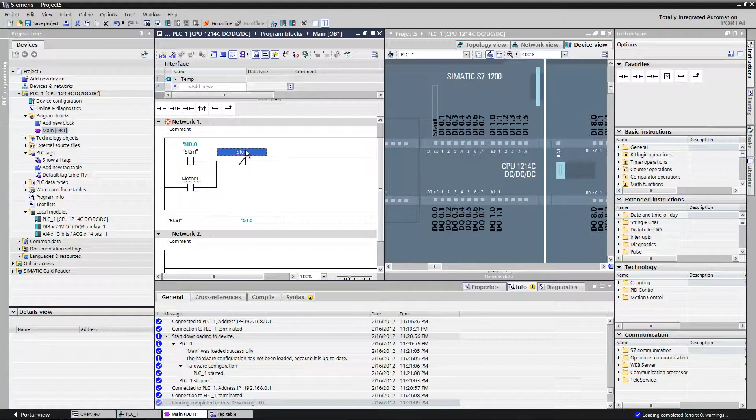These simple movements can add complexity to any automation system, especially if you have a lot of them. Let me show you how easy they can be.

First step is we're going to create a new project. Accept a default name, it's not a problem. We're creating a project container now for all the hardware and software to go into.

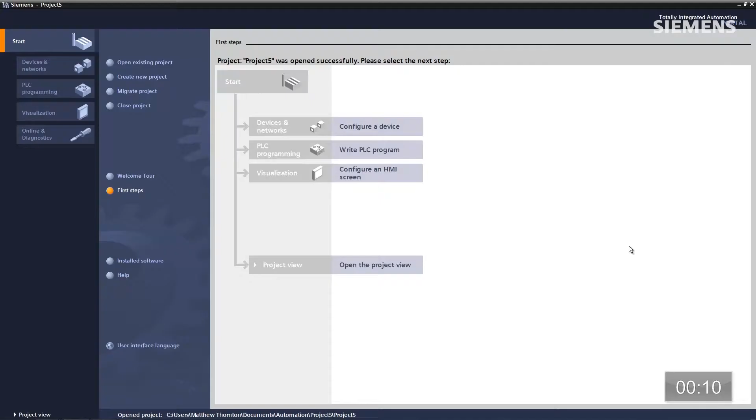Next step is configure a new device, add new device. We're going to choose something called the unspecified S7-1200 CPU, click add. So now we're taking the project container and the hardware container and adding those two together for the project so we can start.

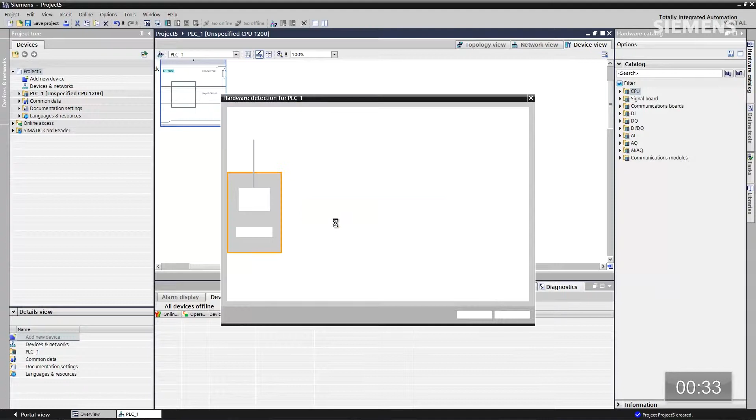Okay, so we have the actual hardware here in the white box. I have a little pop-up box. I can click detect. I'm going to go out and scan the network now, try to physically find that hardware, and we have. I'm going to click on it, and in fact I can click the flash LEDs to prove out that this is the correct hardware, the correct piece of hardware I want to detect.

Click detect again. This time we're going to go out and scan Profinet, go find the exact CPU and all the associated I/O cards as well as communication cards, and bring it back into the project so we can start programming immediately. The beautiful thing about this is I don't have to use the hardware catalog to pick and choose every single piece part. I can scan it, find it, bring it into the project, and go.

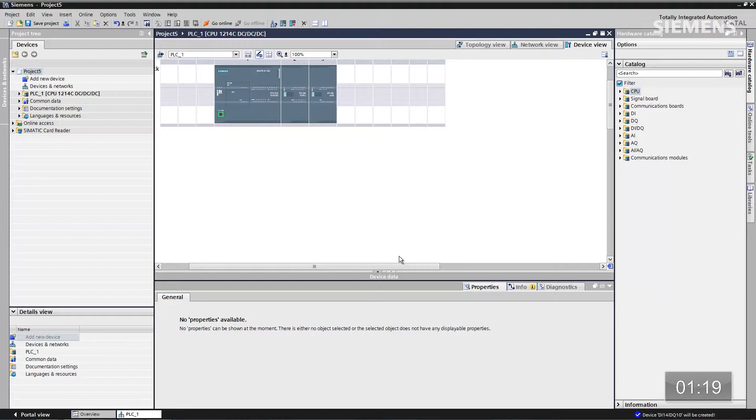Next step, what if we want to change an attribute of this hardware? Let's do that. Let me right click on this analog card, click properties. Now you can see I have plus or minus 10 volts for this analog card. I'm going to choose plus or minus 5 volts.

I'm going to give focus to the CPU and I'm going to click download. So now I'm taking the physical hardware configuration, including attribute changes, and downloading it to the actual hardware set so that it's an operational piece of hardware.

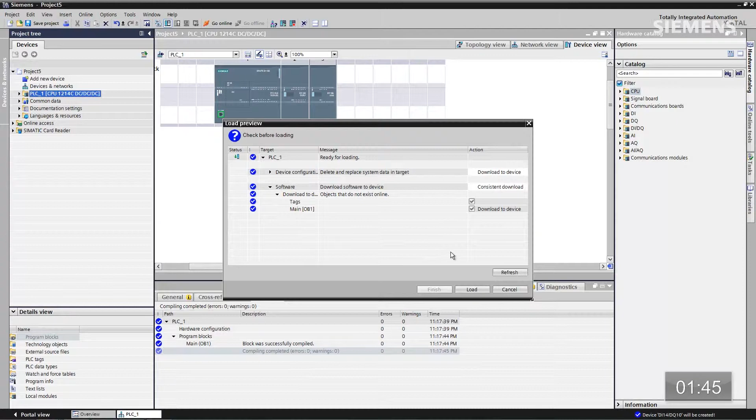It's compiling in the project. I click load. Now it's actually loading this to the actual CPU itself. Once it's finished loading, I can click the finish button, click start all, click finished, and now we should have a set of all green LEDs for this piece of hardware.

Now, remember I changed one of the attributes for the analog card. That means I could actually turn this analog potentiometer, and you see we actually have red LEDs across this. I went beyond the 5 volts.

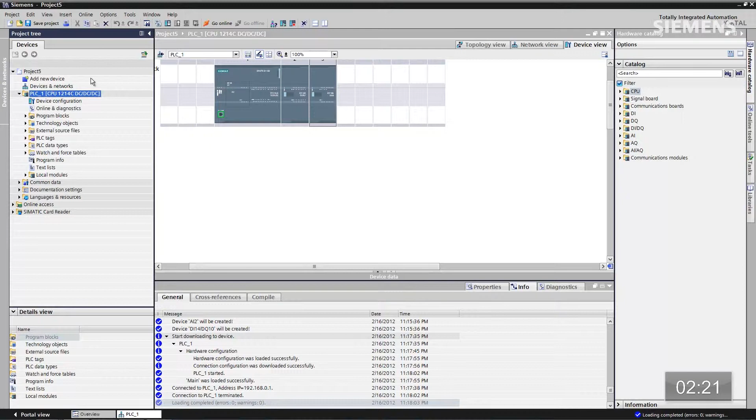One thing you can do immediately is go online with the CPU. Give focus to it, click the online button. Now that we have orange bars across all the physical hardware, you can tell that we've been online with this hardware set, and you can see all the red wrenches here.

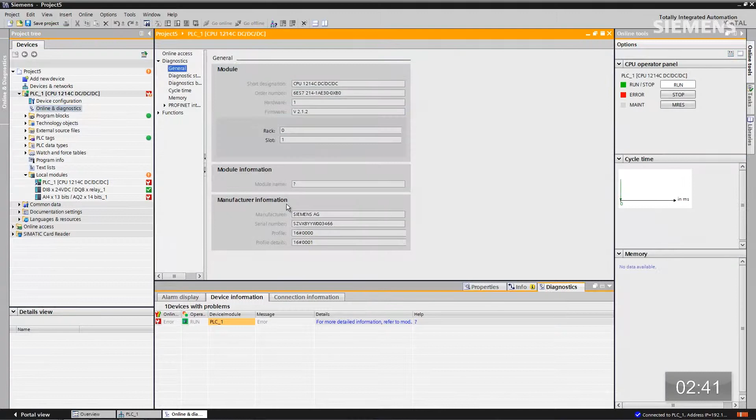I can go down to the module level and see that there's something going on with this analog card. At this point I can double click on online and diagnostics and go to the diagnostic buffer, and as you can see we have a high limit exceeded with the wrench for the actual output of this analog card.

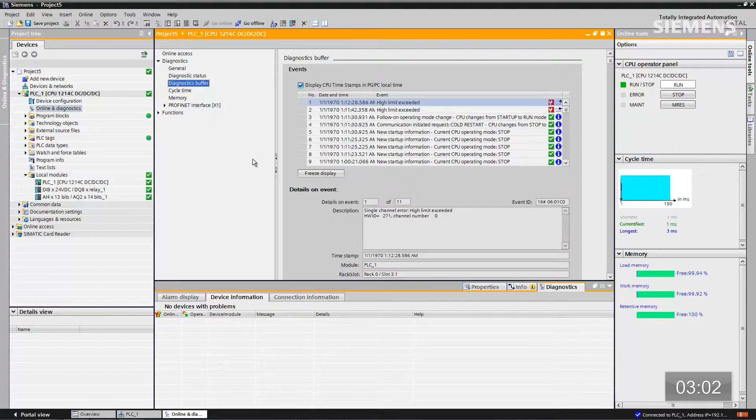So if I go back and solve the problem, turn the switch back, now it's an outgoing message and the issue is solved. Basically this means we have the ability to create online diagnostics for your hardware set, and you didn't have to do a single thing to do that.

You didn't have to program for it, you didn't have to choose any menus, it automatically gives it to you right out of the box. So let's go back offline with this CPU and close this screen, back to the hardware set.

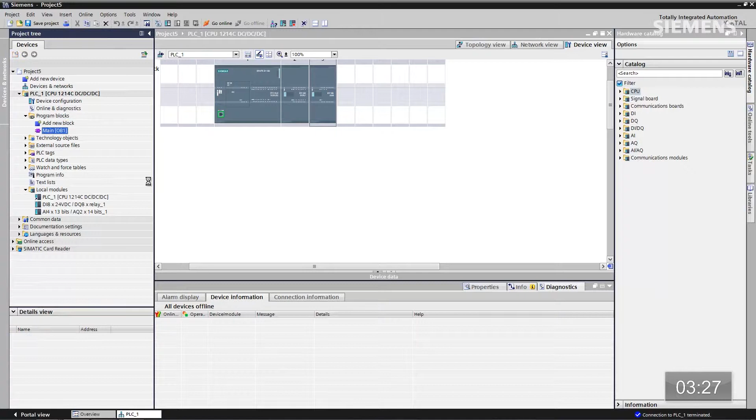How about programming? Let's go ahead and start that right now. First step, the main OB. You can see, if I go here and start flipping dip switches, I have absolutely no program in this particular CPU at this point. It's just a hardware configuration.

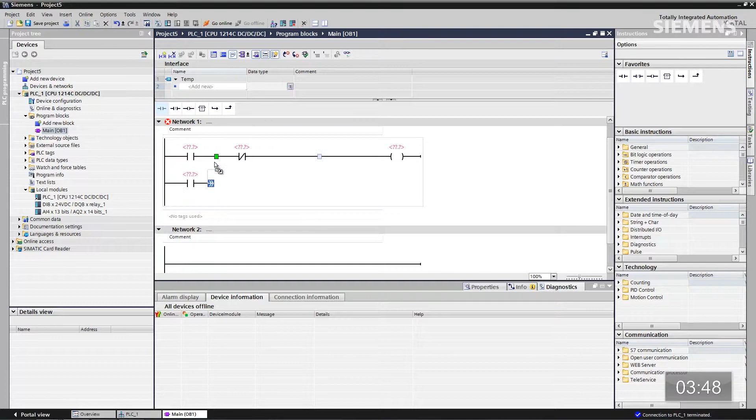Let's go choose a normally open contact, a normally closed contact, a coil, another normally open contact. Let's tie those together. So now I've actually literally built a seal-in circuit, used time and time again in automation engineering. How about the tags?

Let's go start programming that real quick. Let's say start for the first one, motor 1 for the next one, stop, and then for a coil, motor 1. So our seal-in circuit's done, our tags are done, however they're not tied to the hardware set yet.

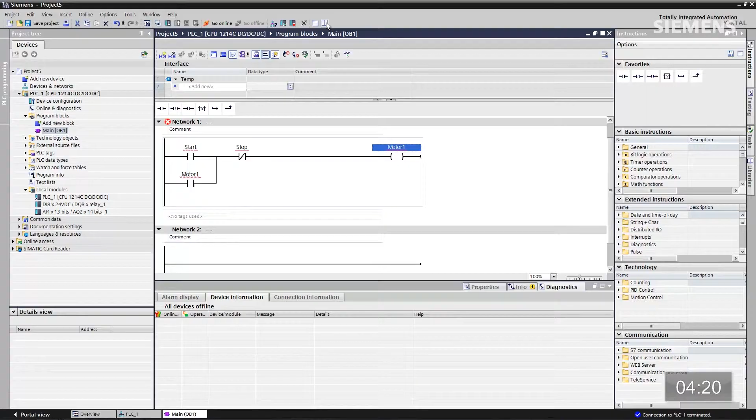So next thing I can do is a split screen, give focus to the CPU, go to 400%, and as you can physically see here, the hardware set has the associated bits of the actual points.

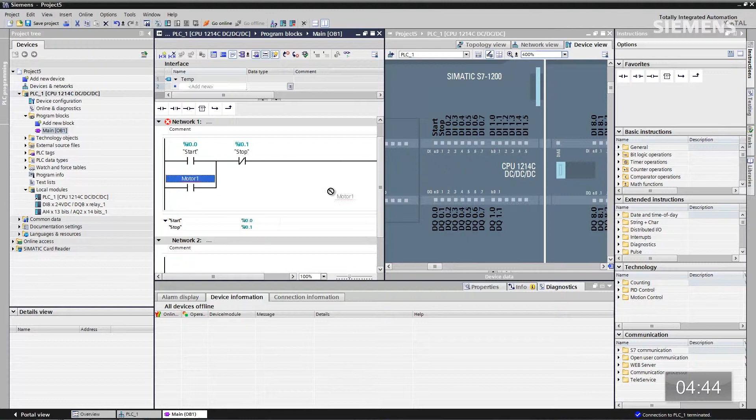Well, guess what? I can drag and drop that start directly to that point. There's the start, there's the stop, there's the motor 1. Our code is now complete.

I did it in just a matter of seconds. I can drag and drop between multiple editors. That's engineering efficiency. Next thing I could do is actually download this quick program to the CPU, give focus to it, click the download arrow button.

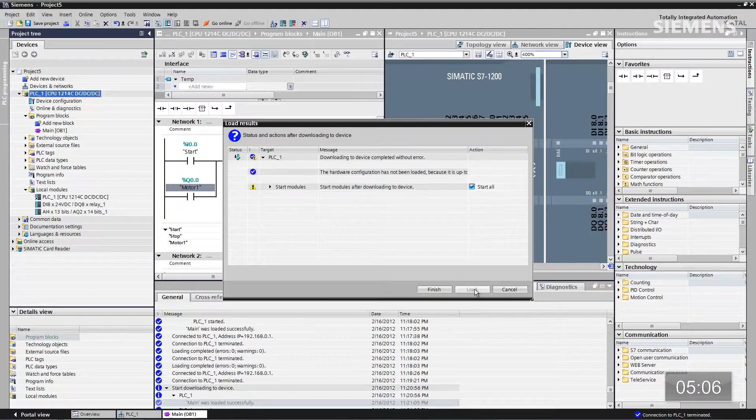Now it's compiling in the background. Click the load button. Now it's actually going to load it to the CPU, and then click finished. And once this LED goes green, you can see that my standard seal-in circuit is complete.

Okay, we've done our standard seal-in circuit. How about user-defined function blocks? We have the ability, from a global library standpoint, to create anything you want from a programmatic standpoint, add it to the library, and reuse it over and over again. That way you can create engineering efficiencies in your daily work.

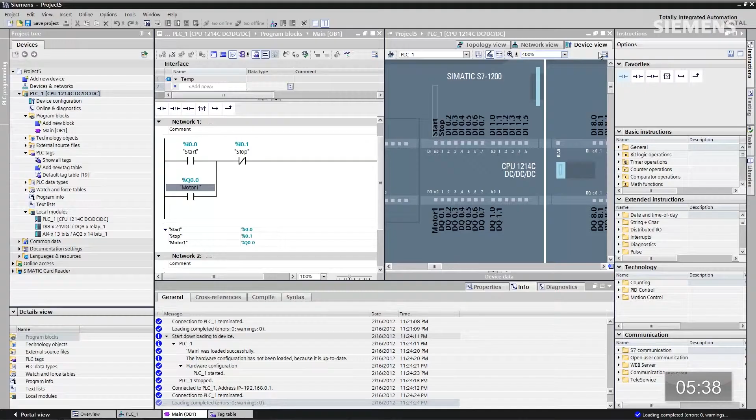Let's do exactly that. Let me close this. Let me click on libraries, drop this down, and you can see I have something called the AT1 simple movements. There's a wiper control block here. Let me drag this into the project.

I'm just going to accept the default data block, no problem. Next thing we can also do is not only can I take a function block, the potential associated tags, you can reuse those over and over again, save those to the global library as well. Let me go grab the wiper control tags, pull it into PLC tags.

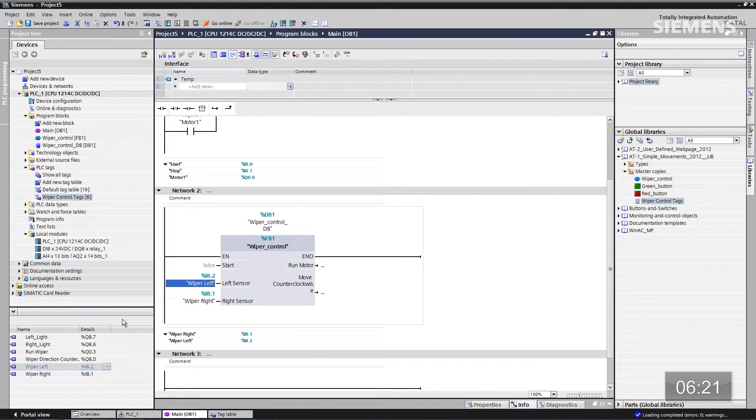Now we have the tags and the block. All I can do is associate them together, and we can move forward. There's the right wiper, there's the left wiper, here's the counterclockwise as well as run wiper.

Next thing we can do within the same editor, I can go grab the actual coil from the sealing contact, hit Control, drag that down to the start, and I can actually use interoperability between lines of code in a single editor. Our code is complete.

If I give focus back to the CPU, click the download arrow button, it's going to compile this in the background. Once it's finished compiling, I can click load. Now it's actually going to load that code to the CPU. Click finished.

And at this point, I have a fully functional wiper control system, and I did it in less than 10 minutes. Now that's engineering efficiency.